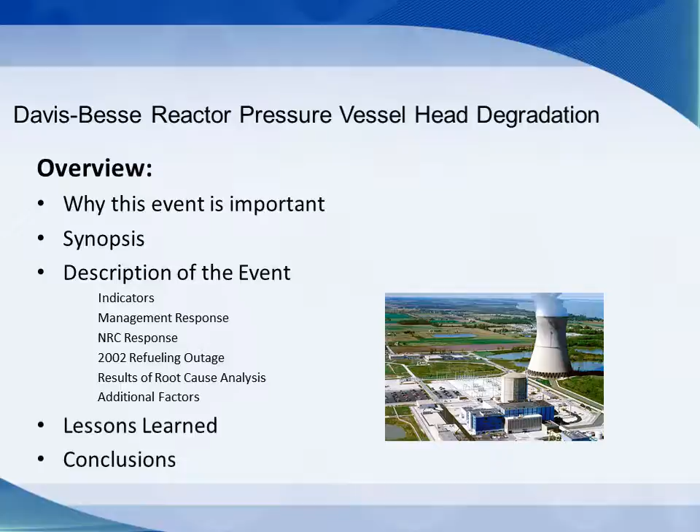Why this event is important. The reactor vessel head sits on top of the reactor vessel and is part of the primary pressure boundary, which is designed to withstand up to 2,500 pounds. Normal operating pressure is about 2,000 pounds. It also contains the penetrations for the control rod drive mechanisms and various other in-core instrumentation.

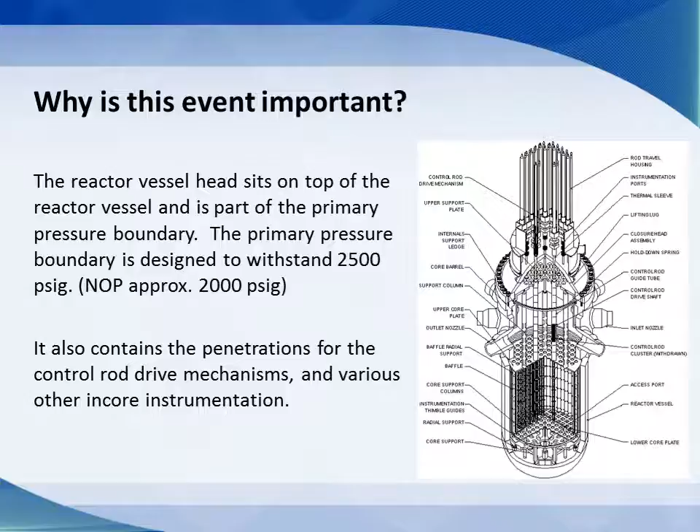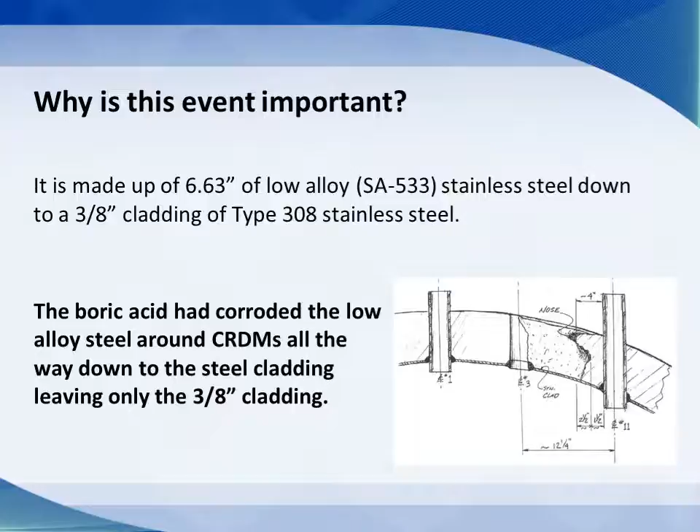It is made up of 6.63 inches of low alloy stainless steel on top of a 3/8 inch cladding of type 308 stainless steel. The boric acid had corroded the low alloy stainless steel around some CRDM nozzles all the way down to the cladding, which alone was not designed for these pressures. This could have resulted in an unisolable loss of coolant accident and initiated the emergency response systems.

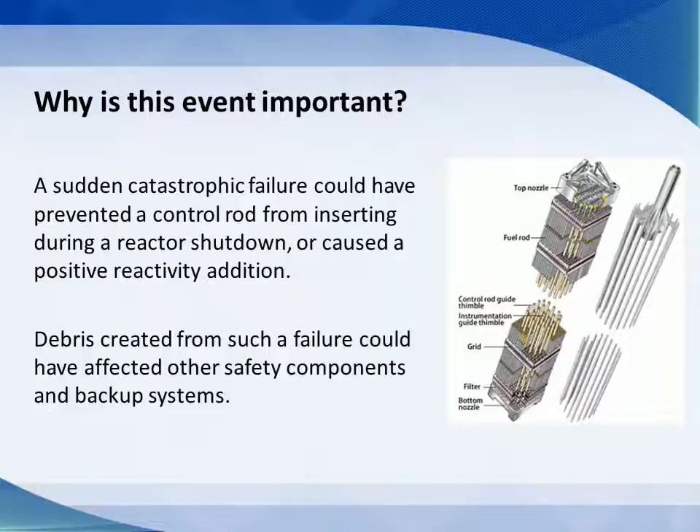A sudden catastrophic failure could have prevented a control rod from inserting during a reactor shutdown or caused a positive reactivity addition. Debris from such a failure could have affected other safety components and backup systems. During a scheduled refueling outage in 2002, workers inspecting CRDM nozzles identified 5 CRDMs with through-wall leakage at the nozzles. While attempting to repair these nozzles, they found additional significant damage to the reactor vessel head.

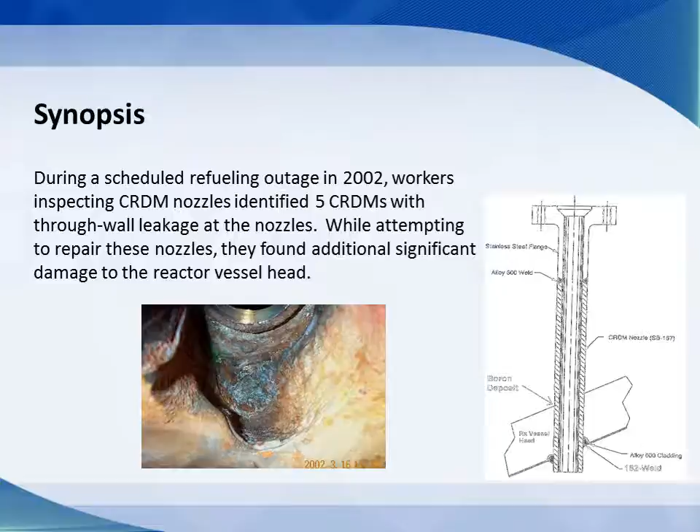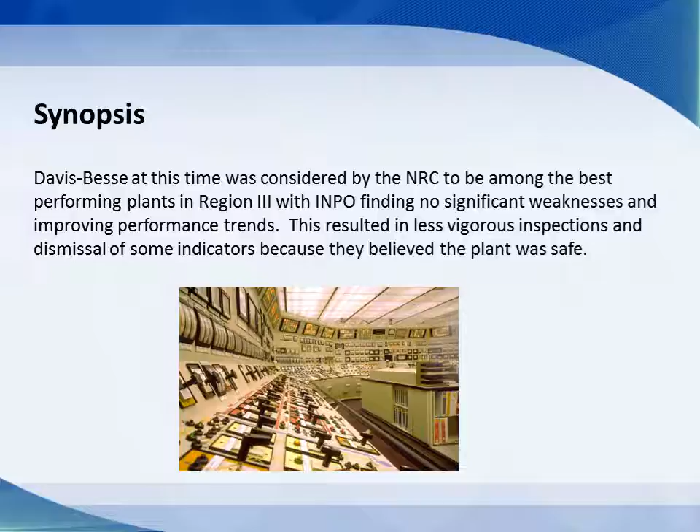Davis-Besse at this time was considered by the NRC to be among the best performing plants in Region 3, with INPO finding no significant weaknesses and improving performance trends. This resulted in less vigorous inspections and dismissal of some indicators because they believed the plant was safe. The following are a list of indicators of the boric acid corrosion at Davis-Besse.

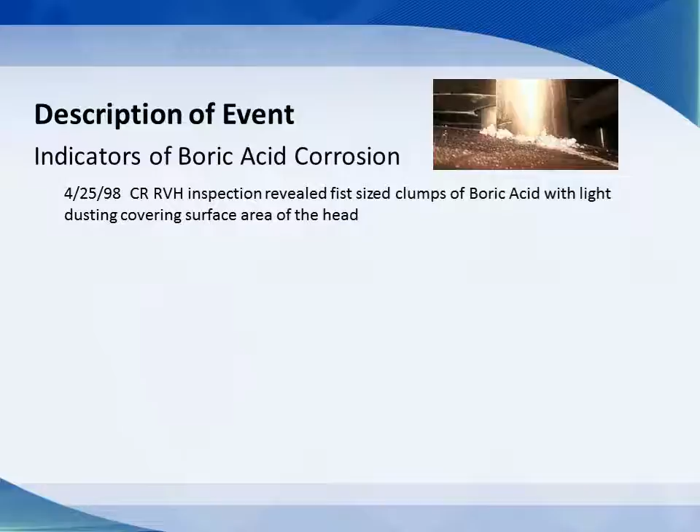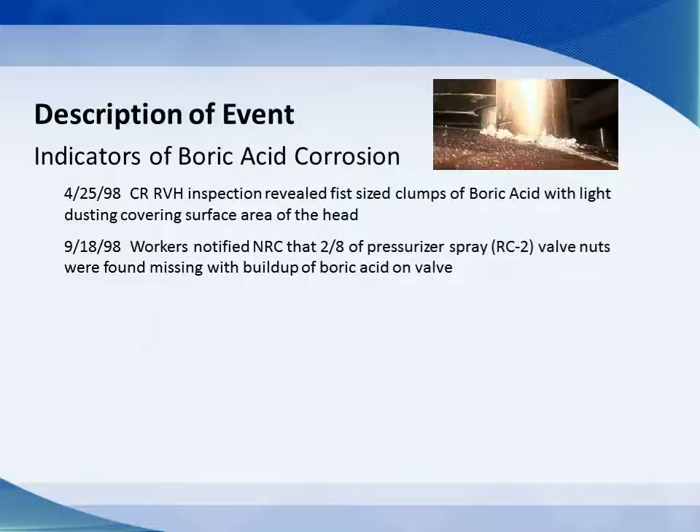On April 25, 1998, a condition report revealed fist-sized clumps of boric acid with light dusting covering the surface area of the vessel head. On September 18, 1998, workers notified the NRC that 2 of 8 pressurizer spray valve nuts were found missing with buildup of boric acid on the valve. On July 30, 1999, a condition report documenting the results of lab analysis indicated iron oxide from corrosion deposits on

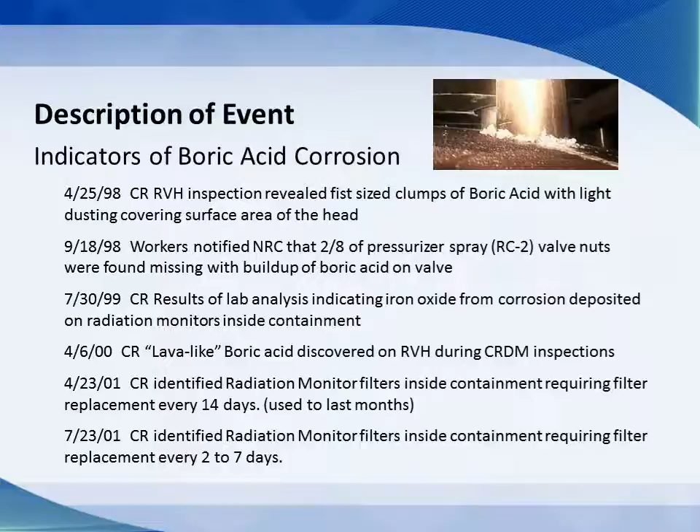radiation monitors inside containment. On April 6 of 2000, a condition report identified lava-like boric acid had been discovered on the reactor vessel head during CRDM inspections. On April 23, 2001, a condition report identified radiation monitor filters inside containment requiring filter replacement every 14 days. The filters used to last for months. On July 23, 2001, the radiation monitor filters were required to be replaced every 2 to 7 days.

The next 2 slides show a list of communications and responses by the Nuclear Regulatory Commission. On March 17, 1988, the NRC issued generic letter 88-05 to address reactor coolant system leaks below tech spec limits to ensure boric acid corrosion did not result in pressure boundary degradation. On April 1, 1997, the NRC issued generic letter 97-01 to address degradation of control rod drive mechanism nozzles and other vessel closure head penetrations.

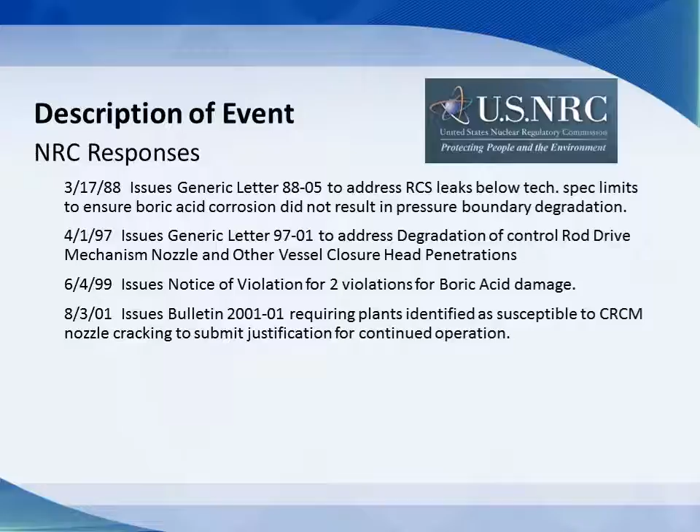On June 4, 1999, Davis-Besse was issued a notice of violation for 2 violations for boric acid damage. On August 3, 2001, the NRC issued Bulletin 2001-01 requiring plants identified as susceptible to CRDM nozzle cracking to submit justification for continued operation past the end of the year. On September 28, 2001, the NRC contacted Davis-Besse to discuss the CRDM nozzle cracking.

On October 3, 2001, the NRC staff identified Davis-Besse as not meeting the technical basis proving conditions adverse to quality were being managed. Then on November 16, 2001, the NRC orders Davis-Besse to shut down by December 31st to conduct inspections. On December 4, 2001, the NRC agrees to allow Davis-Besse to continue to operate until their next scheduled outage without performing the inspections required by Bulletin 2001-01.

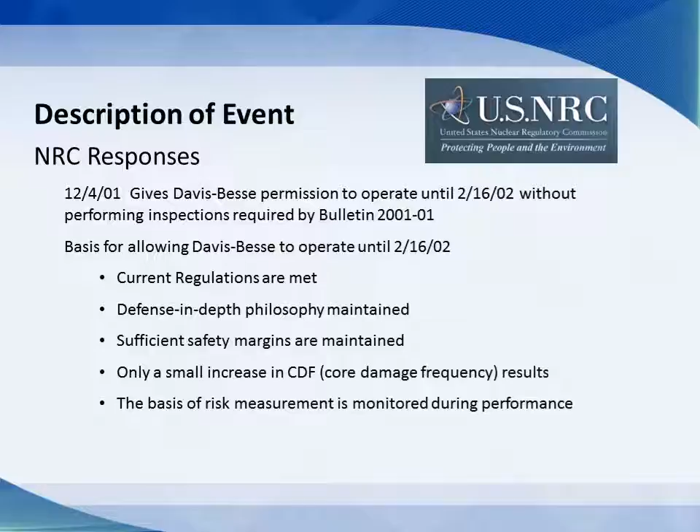Their basis for this decision was that current regulations were being met, the defense in depth philosophy was maintained, sufficient safety margins were maintained, only a small increase in the core damage frequency resulted, and the basis for risk measurement is monitored during performance. And here are some of the management responses. On July 1, 1999, Davis-Besse responded to the notices of violation for the pressurizer spray valve nuts and promised it was developing a revision to the boric acid control program.

On October 11, 2001, Davis-Besse briefs the NRC stating that all CRDM penetrations were verified to be free from boron deposits during the previous 2 outages. Then on October 24, 2001, they came back and told the NRC that 24 CRDM penetrations were not examined during the outage in 2000. On November 8, 2001, they show the NRC select portions of photographs and videos taken during the 1998 and 2000 outages. On November 28, 2001, they commit to a number of measures to continue to operate until the next outage, which is February 16, 2002.

Up to this point, I've discussed the indicators, the NRC communications, and the management responses. Now let's look at the series of events that took place during the outage. On February 16, 2002, Davis-Besse shuts down the reactor for a scheduled outage. On February 21st, workers discover large boron accumulations on the reactor vessel head. On February 26th, the workers report more boron than expected on top of the reactor vessel head.

On February 27th, ultrasonic testing reveals axial flaws in the weld region of the number 3 control rod. By the completion of the ultrasonic testing, 5 CRDM nozzles were identified to have axial crack indications, with 3 exhibiting through-wall leakage. On March 7th, bottom-up ultrasonic testing revealed significant degradation of the reactor vessel head. In this slide, we can see photographs taken at 2 of the nozzles where boric acid had significantly corroded the low-alloy steel.

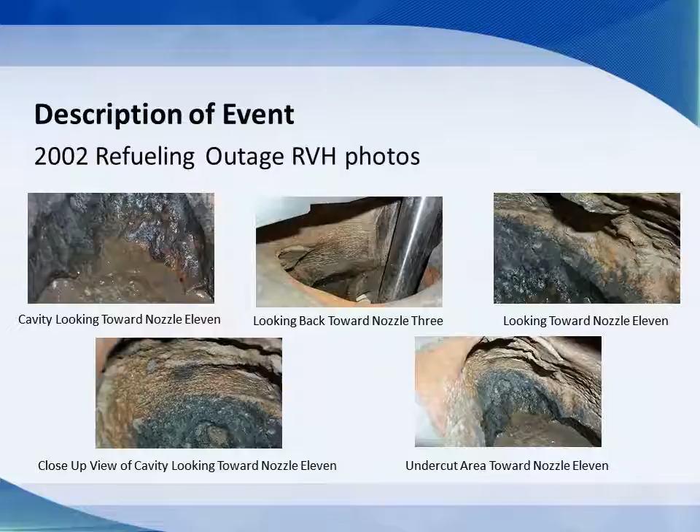After being notified of these discoveries, on March 12, 2002, the NRC notifies pressurized water reactor plants of the reactor vessel head degradations that were discovered at Davis-Besse. They also charter an augmented inspection team to determine the history of the reactor coolant system operational leakage, the history of the reactor vessel head material condition, the history of the reactor vessel head inspections, and characterization of all reactor vessel head corrosion damage.

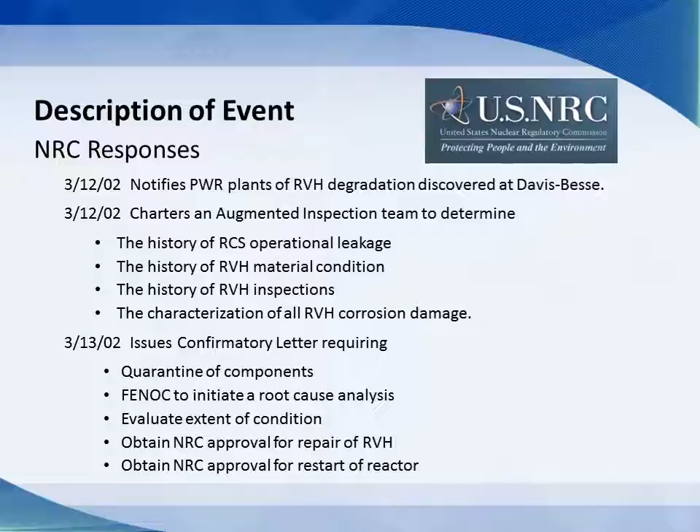Then the following day, they issue a confirmatory letter requiring quarantine of all components associated with the damages, for Davis-Besse to initiate a root cause analysis and evaluate the extent of condition, and for the plant to obtain NRC approval for repair of the reactor vessel head and to restart the reactor. On March 18th, the NRC requires all pressurized water reactor owners to provide information about their reactor vessel head inspections.

On April 4th, the NRC alerts all pressurized water reactor owners of warning signs overlooked at Davis-Besse. On April 29th, they invoke the manual Chapter 350 process to oversee restart activities at Davis-Besse. On May 15th, they issue a revision to their confirmatory action letter and charter a lessons learned task force. On August 16th, Davis-Besse has issued a restart checklist identifying restart issues. On September 30th, the Lessons Learned Task Force final report was issued identifying 51 recommendations to prevent a similar event from happening again.

On October 30th, they notified Davis-Besse that containment sump modifications were required before startup. On February 25, 2003, the NRC issues Davis-Besse a red finding for damages to the reactor vessel head. Then October 7th, they issue yellow finding violations for high-pressure injection pump vulnerabilities all the way back from the date of commission. On March 8, 2004, the NRC closes the confirmatory action letter and approves restart of Davis-Besse.

On August 15th, they had completed a root cause analysis for evaluation of management failures. On September 5th, they committed to resolve the management failure issues. On May 5th, 2003, the management team identifies the high-pressure injection pumps as vulnerable to possible debris from reactor vessel head failure. Then on February 12, 2004, Davis-Besse reports completing the restart checklist and requests for restart.

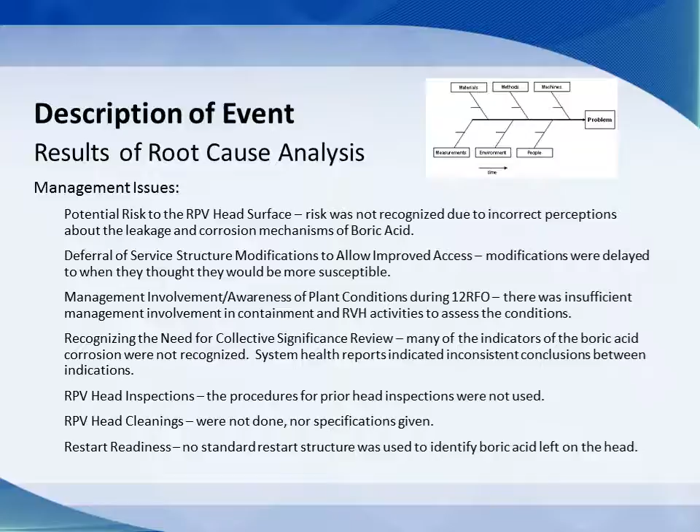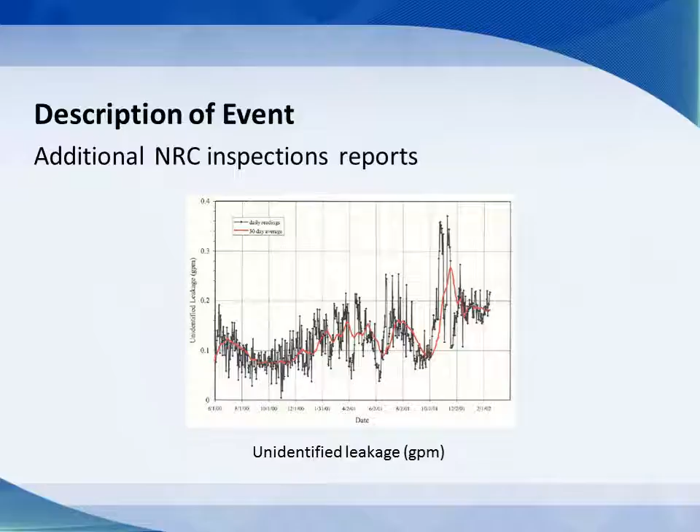Here are some additional factors that were identified during this event. On June 24, 2002, workers initiated a condition report to inquire about the effects of boric acid on trisodium phosphate to control pH level in the event of a loss of coolant accident. On July 15th, workers inquired regarding the ability of backup safety systems to function properly if stainless steel from the damaged reactor vessel head created debris that could clog containment sumps.

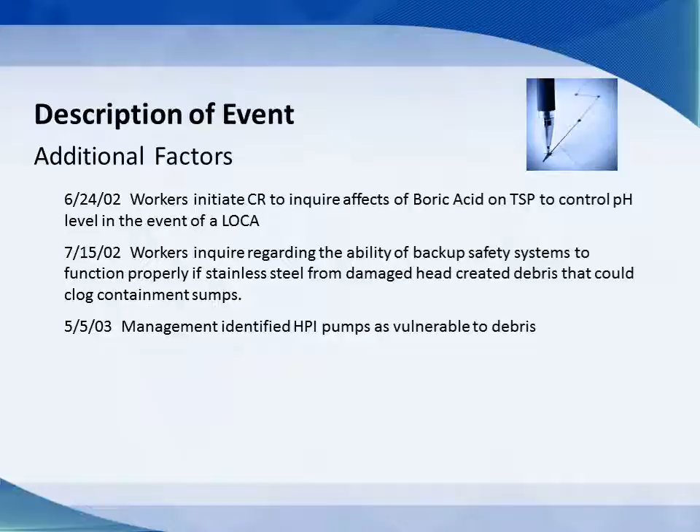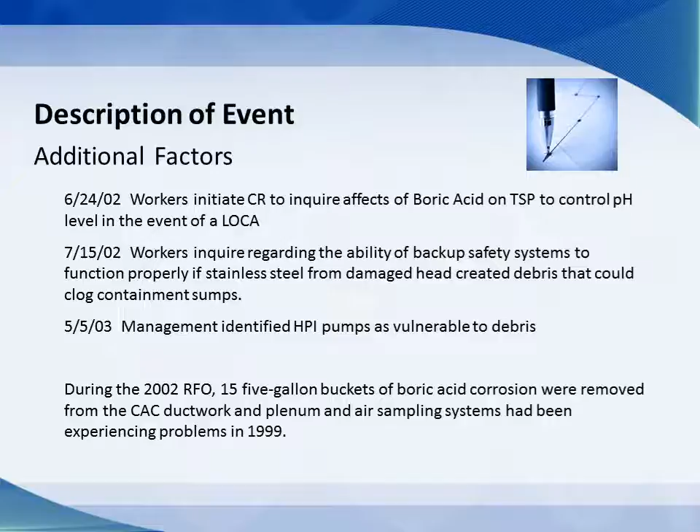On May 5, 2003, management identified the high-pressure injection pumps were vulnerable to this debris. During the 2002 refueling outage, 15 5-gallon buckets of boric acid were removed from the containment air cooler's ductwork and plenum, and containment air sampling systems have been experiencing problems since 1999. Here is a list of other major upgrades that took place as a result of this event.

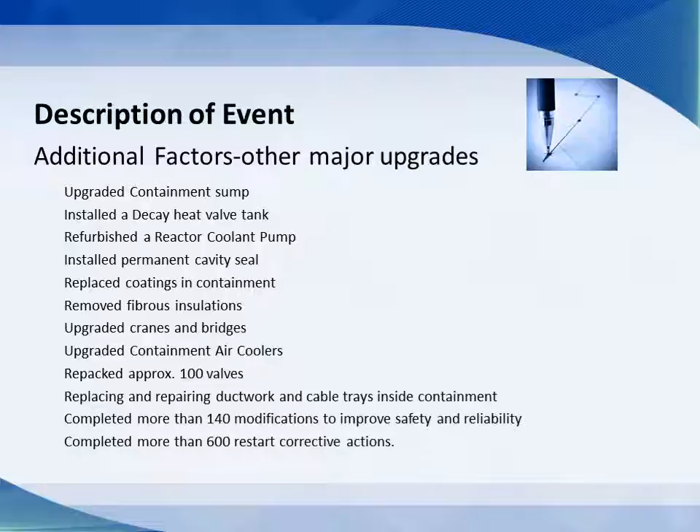Now we'll talk about some of the lessons learned by the NRC. The NRC worked with the American Society of Mechanical Engineers to develop long-term inspection requirements of reactor vessel heads and ordered all licensed plants to visually inspect the reactor vessel head surface areas for indications of leakage as well as using methods to detect cracks before leakage starts.

The Reactor Operating Experience Program was established to collect and communicate industry events and lessons learned. A new webpage was created with an organization to evaluate and screen incoming reports. A new communication tool was established to notify NRC staff of developing OE in their areas of expertise.

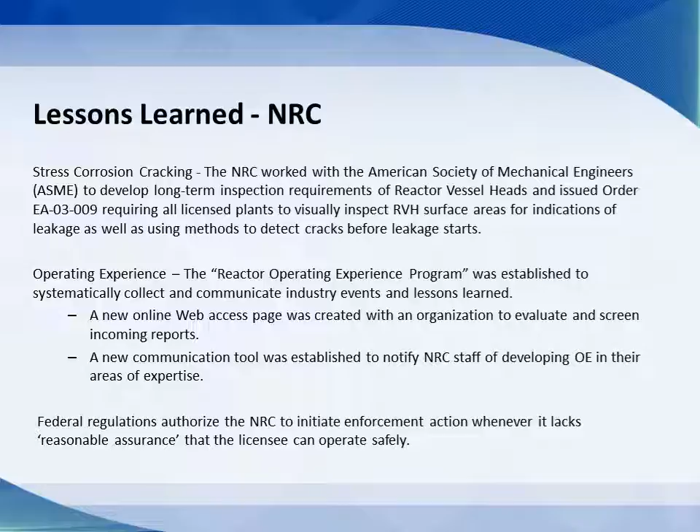It was identified that federal regulations authorize the NRC to initiate enforcement actions whenever it lacks reasonable assurance that the licensee can operate safely. Several changes were made to enhance the NRC's ability to detect declining plant performance, including specific issues identified by this event. Deteriorating conditions that planned inspections, maintenance, and modification activities could have prevented and enabled earlier discovery were frequently deferred.

They would increase evaluation of programs and actions related to long-standing unresolved problems. This includes 3-year audits of management programs. The NRC Inspector Training Program was enhanced by web-based systems. The reactor oversight process was strengthened to detect weaknesses in safety culture. There would be devoted resources to plants in extended outages or that have performance issues. And finally, they established a site staffing metric for permanent resident and senior resident staffing criteria for maintaining 90% coverage.

Some of the lessons learned at Davis-Besse include improvements in their boric acid corrosion control program, the reactor coolant system integrated leakage program, their in-service inspection programs, and the addition of a leak monitoring system to enhance leak detection capabilities.

Some of the lessons learned by the industry include EPRI's Materials Reliability Program revised their safety assessment reports to become top-level documents for industry safety assessments. Westinghouse appointed a task team to develop generic guidance for an effective boric acid inspection program for pressurized water reactors to help meet the ASME requirements.

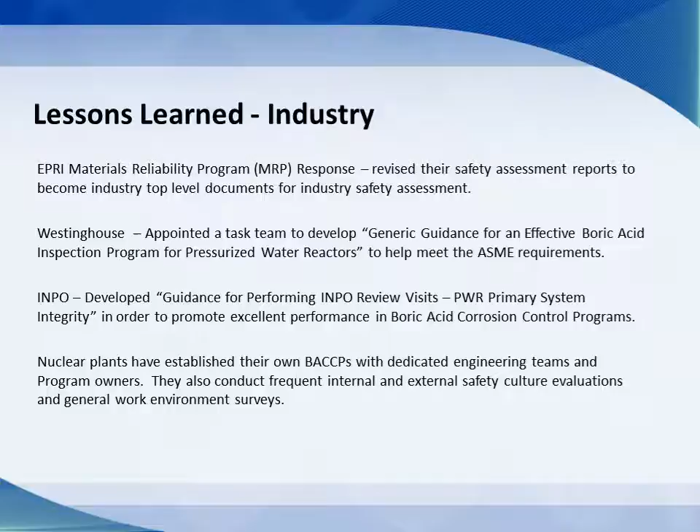INPO developed guidance for performing INPO review visits, pressurized water reactor primary system integrity, in order to promote excellent performance in boric acid corrosion control programs. Nuclear plants have established their own boric acid corrosion control programs with dedicated engineering teams and program owners. They also conduct frequent internal and external safety culture evaluations and general work environment surveys.

In conclusion, the boric acid corrosion that took place on the Davis-Besse reactor vessel head is probably the worst known accident to not happen in the nuclear industry. While the potential significance of this event could have been catastrophic, the damages were caught before any serious plant damages took place. There were several indicators as to the degradation that was taking place with the reactor vessel head which could have been observed and actions taken to prevent this incident from happening in the first place. But it has revealed other important factors in the safe operation of nuclear power plants as well.

Performance indicators and trends must be highly analyzed and critiqued by generation groups and their respective oversight groups. They must always be rigorous in their evaluations and strive for continuous improvement by maintaining a healthy questioning attitude and performing industry benchmarking. Management decision-making and involvement with plant evolutions and decisions is vital, along with maintaining a safety culture that supports raising concerns. Lessons learned and operating experience do not have to be limited to only be internal to your organization. The benefits of lessons learned from this incident have extended into many fields, including colleges, NASA, the military, and other companies.